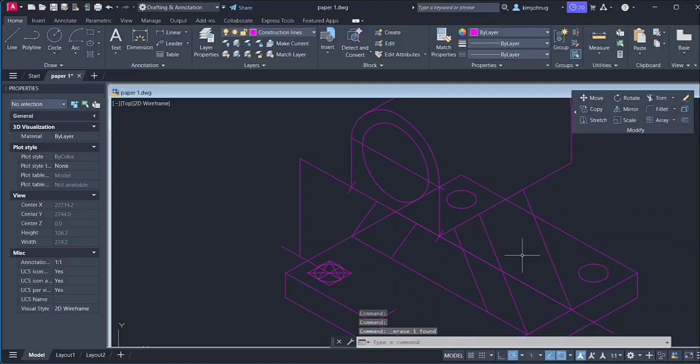So I have to trim this. Okay, so I can move this. Okay, so this line, I want to break it. This point, break, enter. Let's repeat a command which has been used recently.

Just break, just press enter. Now broken these two lines. So no longer need this, of course. My figure is taking shape, right? No longer need this also. Yes, it's taking shape. Don't think I will need this line.

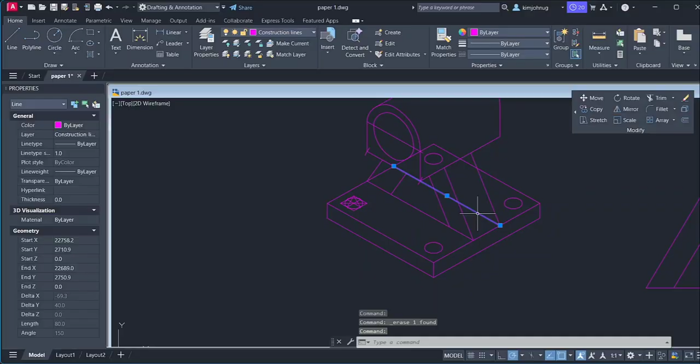Okay, so also in the back here, be honest, I won't be able to see this line, be able to see this line also. This line. So select this. Remember this is already joined, so I just have to select it all. Right. And I want to also be able to see here. I think now it's just taking shape beautifully, right? These two backs. Just taking form beautifully. I can move these.

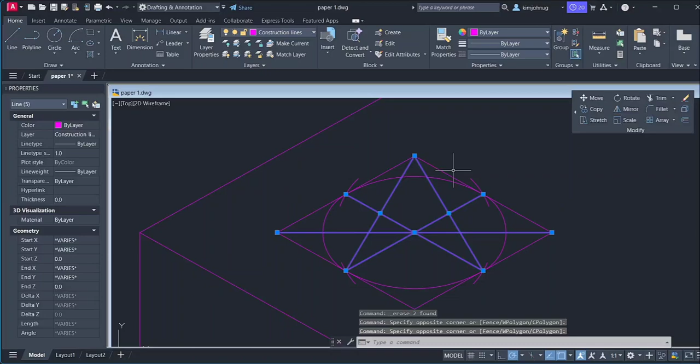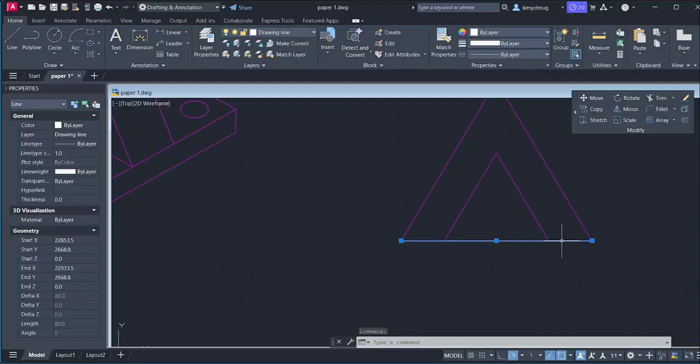So something I would like to show you. I think let me show you here. So let's say I have this figure here, right? Let's say I change this to a drawing line layer. Oh, I delete it. Drawing line layer. And I want to copy this figure without the drawing line. What I can do,

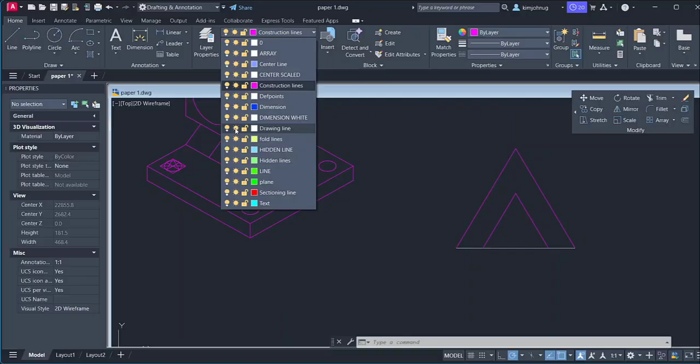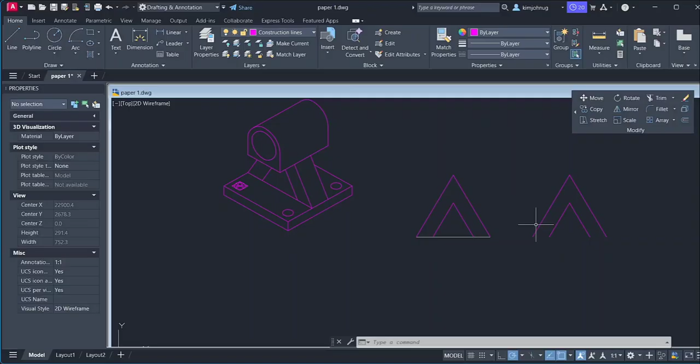I can first select, right? First select, and then I say, I freeze the drawing line. And I copy this. I have to make sure that the layer you're freezing is not the active layer. And then if I go back here and then unfreeze it, you realize that you see the drawing line layer is here, but on the copied one, it's not there. You get it? It's a simple trick, I would like to use it here. Let's just do what we have to do and then move on.

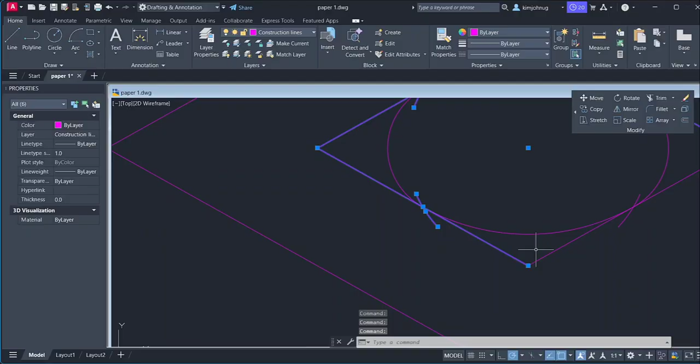Okay, so selecting these arcs and these corners. I know there are many ways of drawing isometric circles. As I told you, I prefer to draw them using my own. Okay, it's like I'm trying not to get rusty, right? I don't want to get rusty.

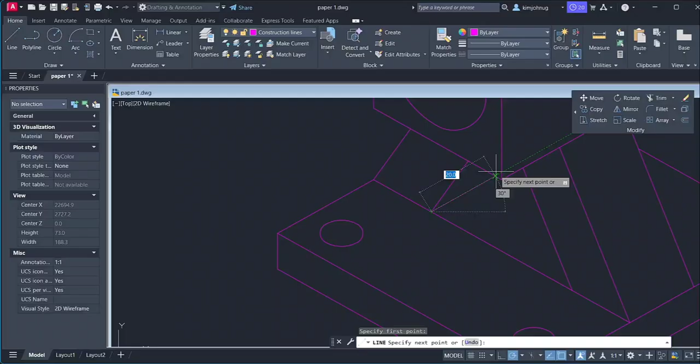So around this point here, there are fillets. Around this point here, there are fillets. So it's not as sharp. So I want to just trim off this. So this thing here is fillet here. There's a fillet here. Okay. So how do we draw this isometric fillet? Most fillets in this figure, they're like radius of 3. Radius of 3. Okay, so what can we do?

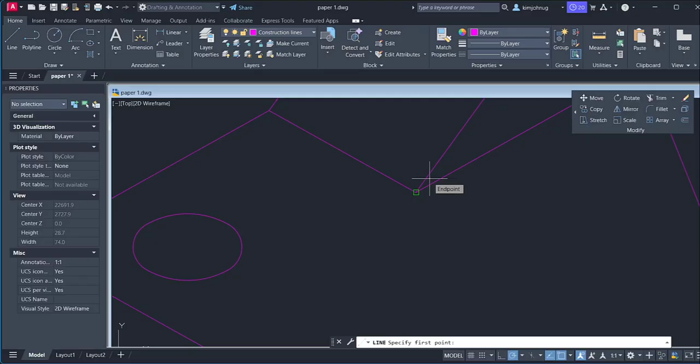We're going to draw radius here. Let's first try to draw it outside. I didn't see. I want to draw an isometric circle. 3. So meaning would be 6, right? 6, 6.

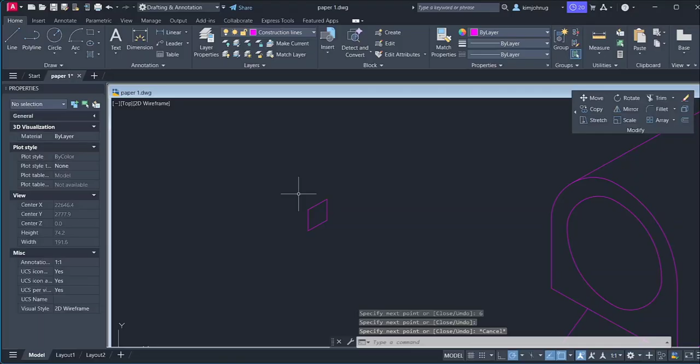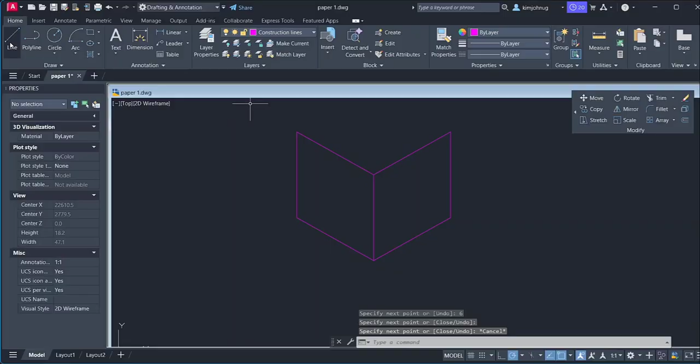Along this 6. I'm sure that the angle is so 180 minus 150 is 30, right? 6. In the midpoint, I'm trying to see. I'll be able to fillet that. Oh, can the fillet tool help me?

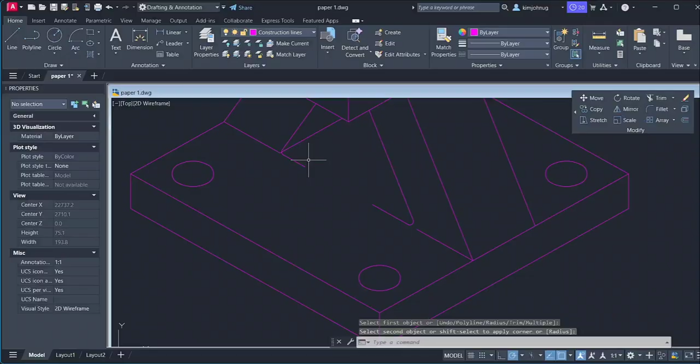It's just doing it. Hey. This is interesting. Okay, fillet. Want to fillet this? Want to fillet? Hey, just does it like that. Random. So if I want to extend this line to here, I can just extend it there, right? Do the same thing here, extend it there. Trim. Let's remove that. And of course, remove this. Remove this.

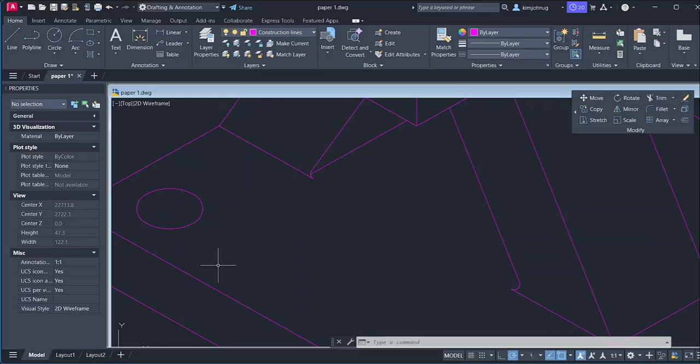So I want to use the divide tool because I want to fillet also this portion here, this line here. Fillet it. So I can array these curves along here, along this line. So I use the rectangular array for this array. That's array am I using? Yeah, I want the path array.

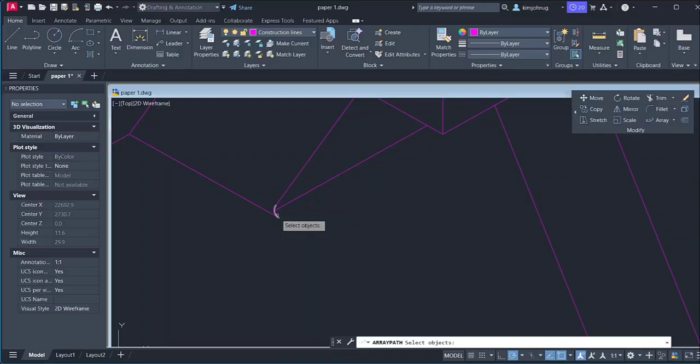Select objects here, then select path, enter. Sorry, array, select object here, enter, select path here, right? Okay. So if the spacing is too big, I can see that the distance between is 2.2. So I can, if I want to reduce it, I can say 2. I can even say 1.

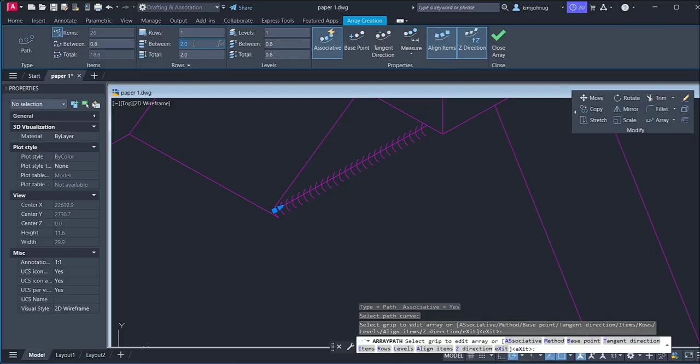But I think that works. That's enough, right? I don't need this line. Okay. So that's showing us that thing is related there. Okay. Oh, this wasn't necessary. Really? Okay, what is the radius of this fillet? So radius is 1. Okay, it works.

I have no problem with it. Another thing they're telling me that this thing is these holes are threaded. I want to replicate a thread. So to do that, I'm going to go to

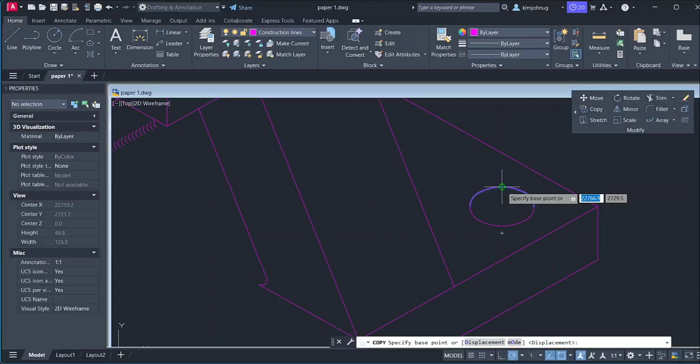a break at a point. Let me break here, break here, join, break. So join. Okay, so I want to copy this. I want to copy it to intervals. To replicate. Let's say let me do 1 right?

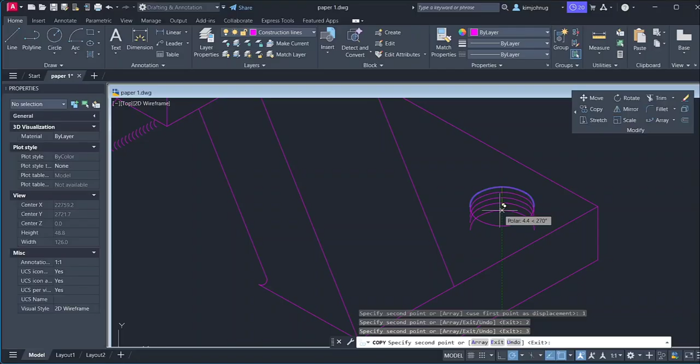So if I'm to do it correctly, I have to copy it at a distance of 1. So from here, if I copy this, the first one is a distance of 1, the second one a distance of 2, the third one a distance of 3, the fourth one a distance of 4, the fifth one a distance of 5, the sixth one a distance of 6, and this one a distance of 7.

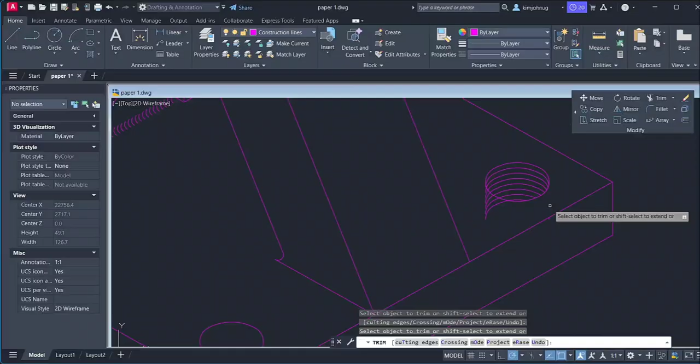I think the seventh one will be the last. I trim off this, trying just to replicate a threaded hole. I draw the extent to make them threaded. That's the one thing I could think of. Maybe you can tell me in your comments if it works. Yeah, I'm saying no problem with it.

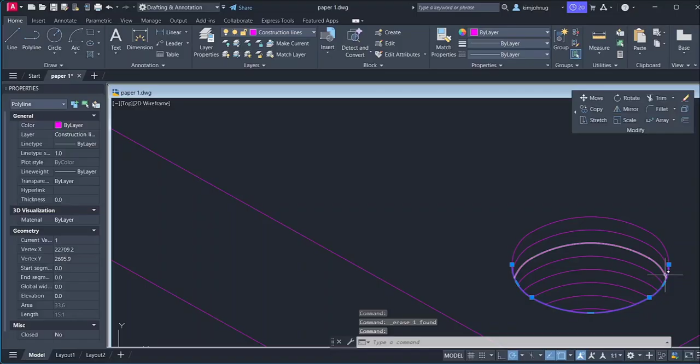So I can copy this, remove my center. I can use this join here because I think this one also has it. The same thing here. Wait, I copy the circle also. Oh, I don't need you. Sorry, don't need you, delete it.

Yes, it gives out the impression of a thread. To me, yeah, I think it does. Yeah, it does, really. So with that done, can literally delete this. Don't need them no more.

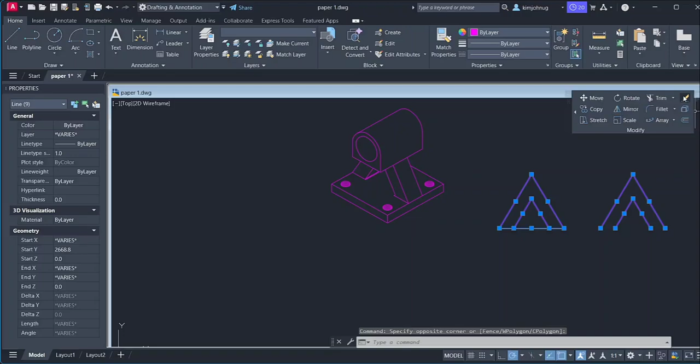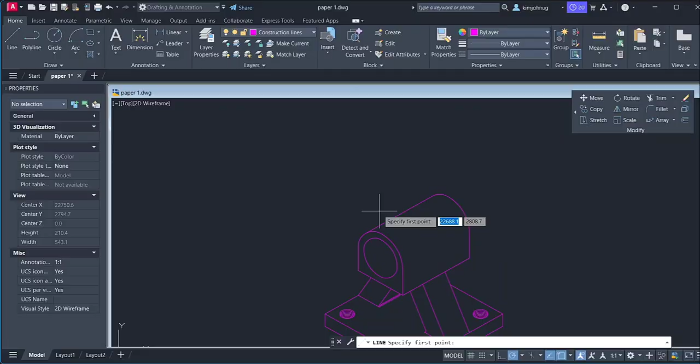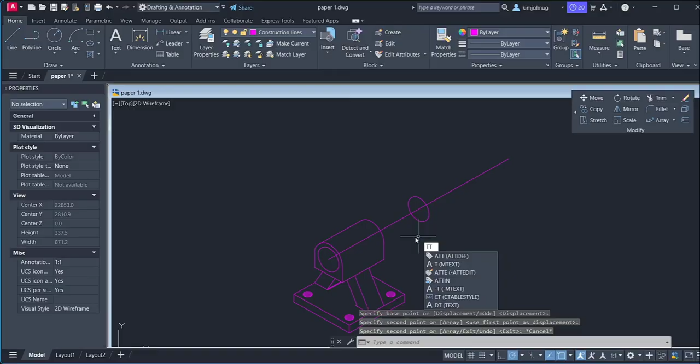So I can just copy this circle, need this to distance. That's close enough, even delete. I delete this line, don't need it more. Okay, so the bearing goes, it's of a distance of 60, so I measure 60. Do I need you no more? I don't think so.

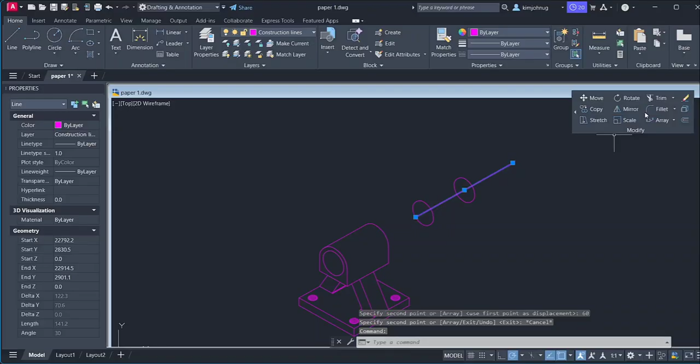Okay, so I'm on the bearing. So I draw a line doing the bearing, draw another line, bearing. So trimming this side and this side. Excellent. So there's another circle inside the bearing of radius. I'm going to do this circle outside here, for some reason.

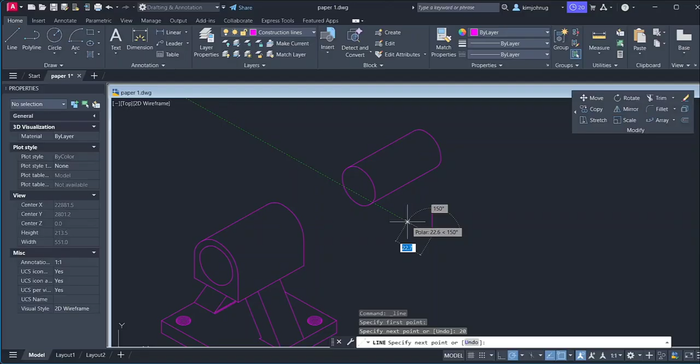Radius diameter 20, meaning it has to be a square of 20 by 20. I want to draw it there. Let me just draw it here, just copy it, right? That one is there.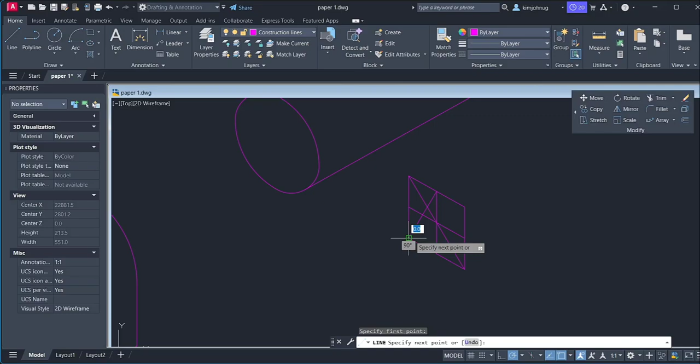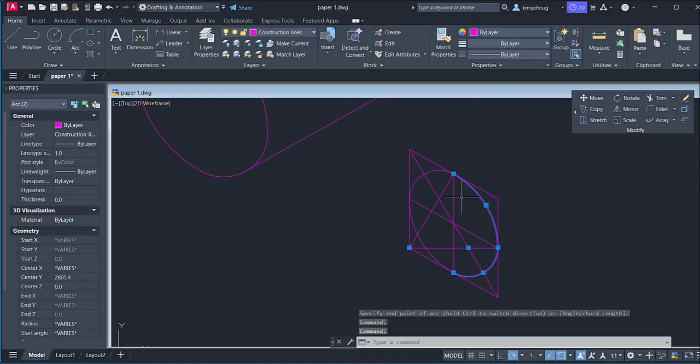So another line here too. Then select your tool, center. Oh, stop again. Tool, center, stop again. How quickly the brain forgets. Someone told me the one thing the brain is good at is forgetting. It's interesting, it's the one job it does right. That's interesting because I have done these things multiple times, but I can't concentrate on where the start and end should be.

So here, bring it. If you're looking for something and you don't see it, you have to just touch on the circle you want the center to be. Okay, I can delete this, I don't need you no more.

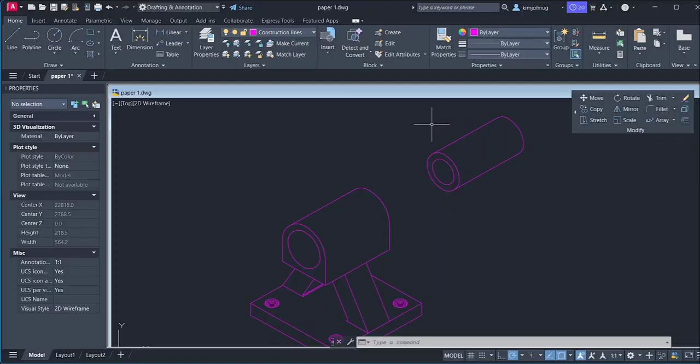Right, so with that our drawing is done. Maybe this one seems a little too far, let me move it a little closer. There. Yes, yeah.

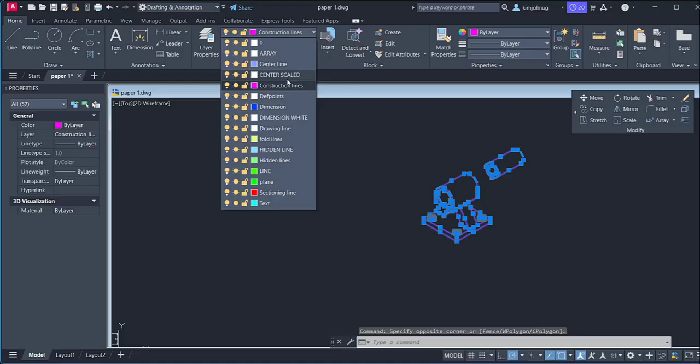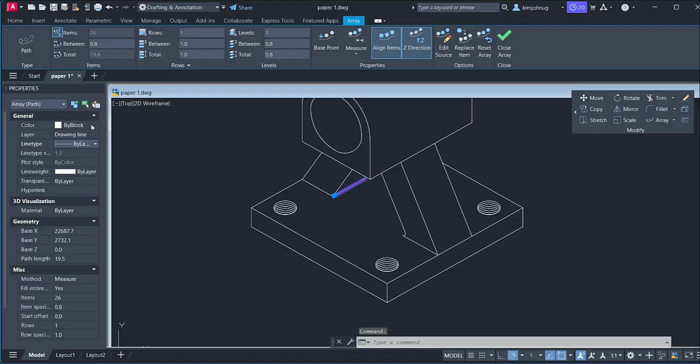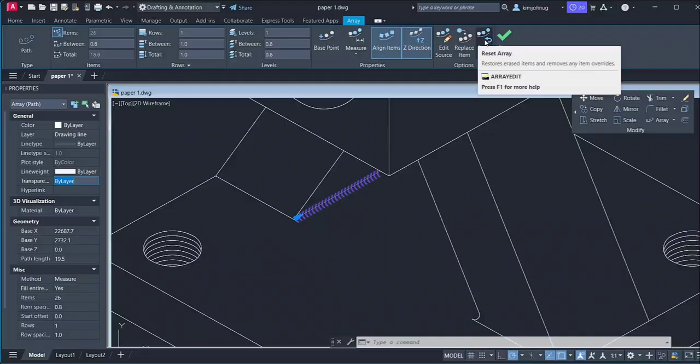Let's see how we deal with that. So with this, our drawing is almost complete. So what's remaining is the dimensions, right? I want to place center lines now. A center line that doesn't pass to the center, interesting, because a center line has to pass to the center, right? That's what makes it a center line, that's what gives it its name.

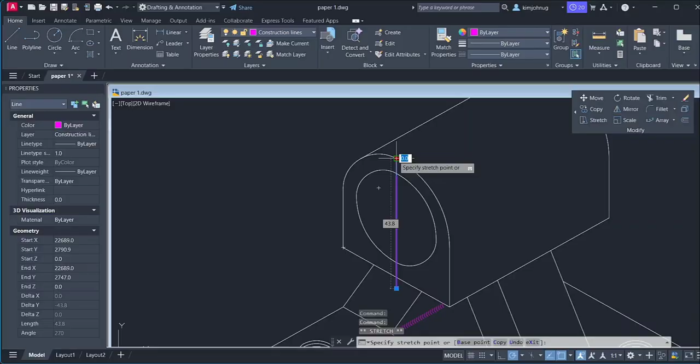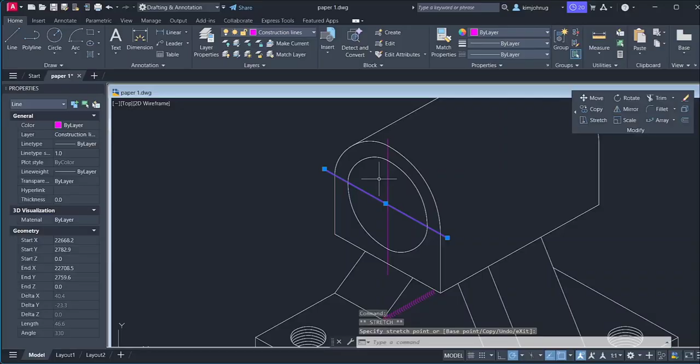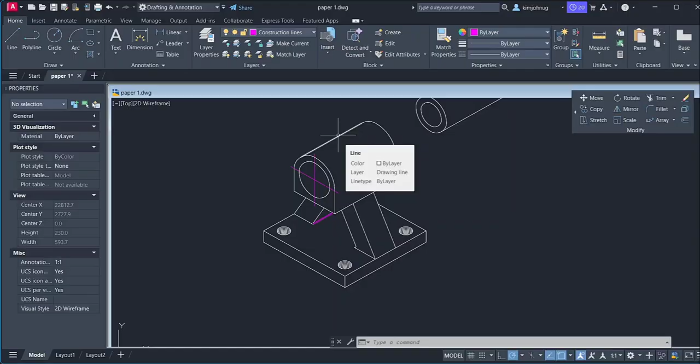It's like the way they named the dandelions, because they resembled lions, resembled the mane of lions, right? So they'd have named them zebra, dandy zebras, because they have nothing they resemble, that's like a zebra. I really like how people name things. Some naming, when naming something, some people are just lazy, right? Yeah, some people are just lazy. Example, like names of which word, they like when you're saying what comes after noon and then you name it afternoon. That's interesting. And then when it's afternoon, close to night, then you name it evening. I think the person who named afternoon was fired. Then they brought in a person to name evening. Interesting.

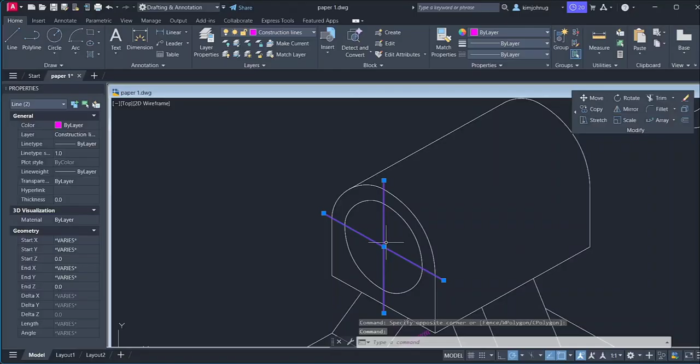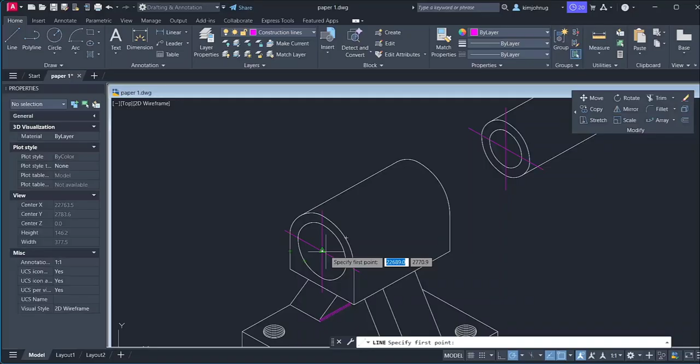Okay, so I'm placing the center line through the centers, of course. Where else should I place them? I'm going to change their layer later. First of all, I'm concentrating on the alignment, right? I like to use the construction layer when I'm drawing.

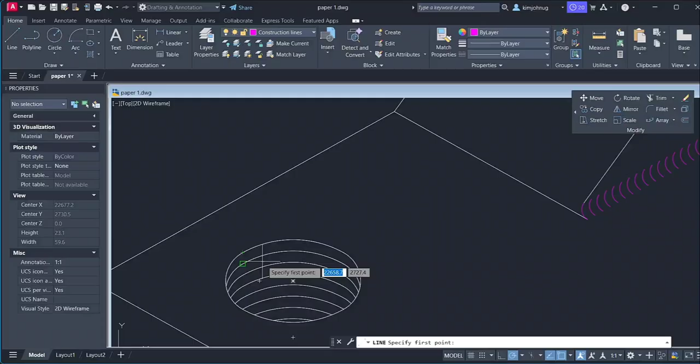I also have to place the center line here. Okay, let me pass it through the center, because the geometric center, the center of... the angle has to be 30. It's with me. Okay.

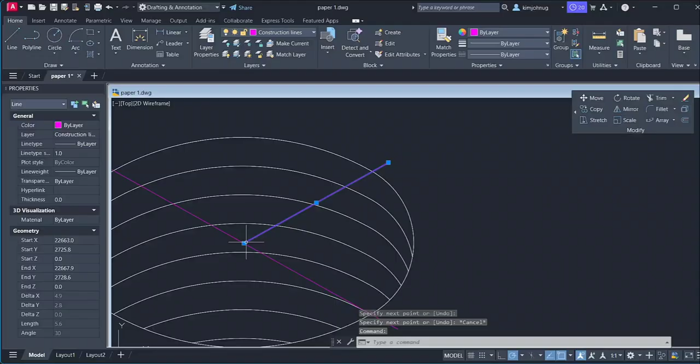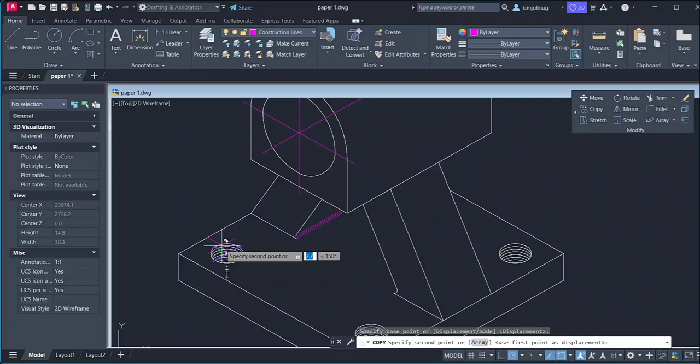I like these points which show the centers to be in the center. I can just copy this to all. Okay, geometric center, where are you? If I don't see you, geometric center, where are you?

Okay, place it there. I just remembered to join this member. Now select, move... geometric center, where are you? Yes, here I am. Okay, so our center lines are there.

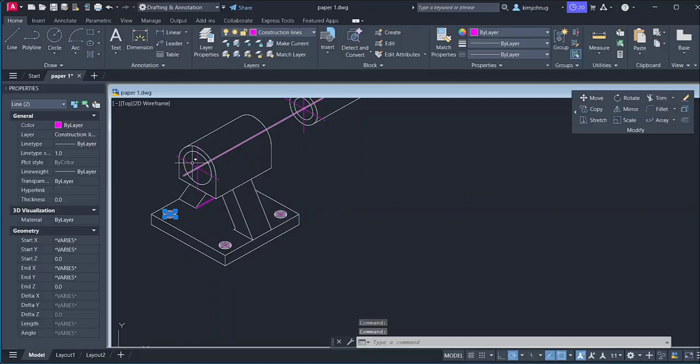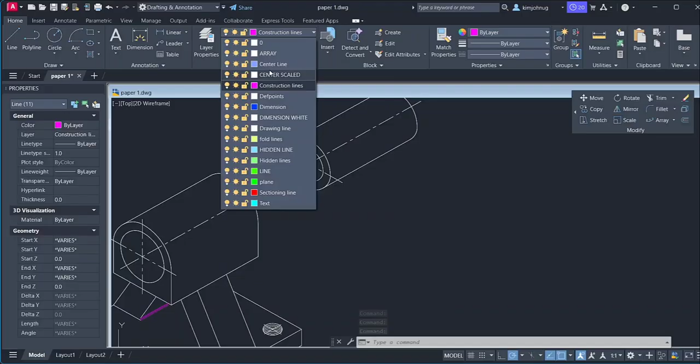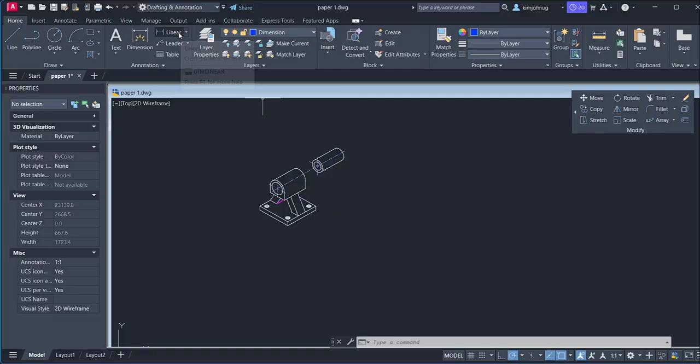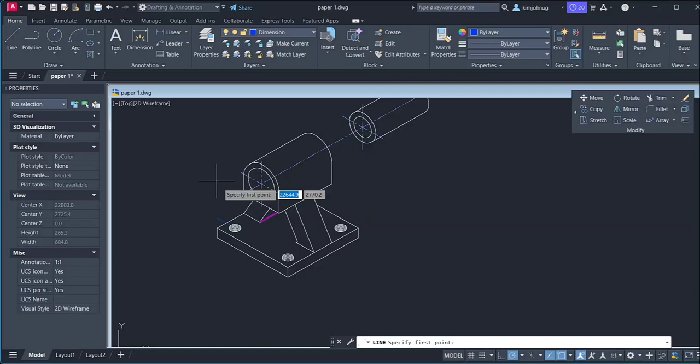Okay, so for dimensions, my dimension layer is blue, and then dimensioning lines. Let me first draw the extensions. One extension starts from here on the center line. Another extension from here, give it some curve. It's a dimensioning rule that the extension line shouldn't touch the drawing.

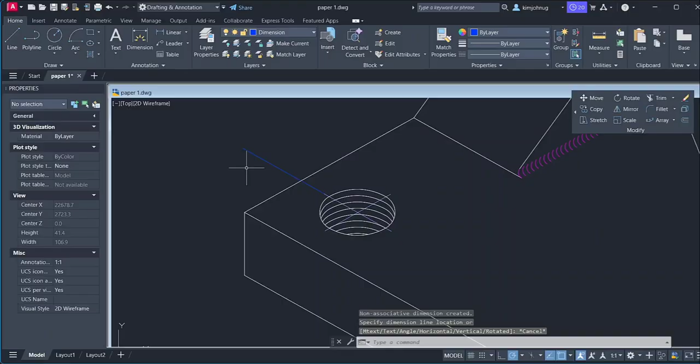First, give it some breathing space. For example, here, the extension line can start from there. I want it to be in line with this. Okay, so it has refused. Yeah, because of the angles. Maybe I can just break it off. This, what I can just copy it. Okay, let me just leave it because I have to cater for this space here.

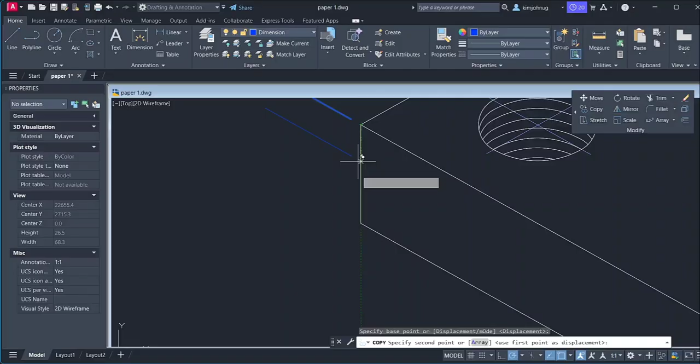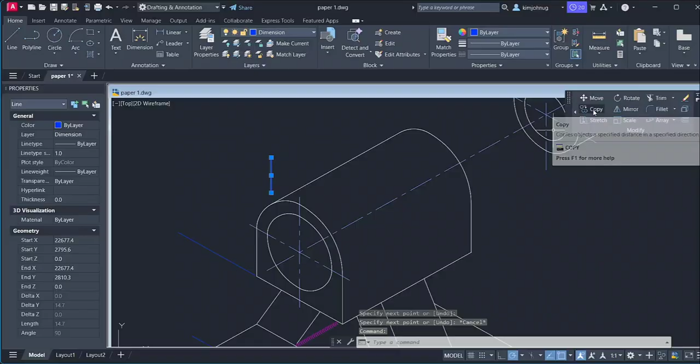I'll just extend it later. I have to copy that from here to here. Where else do you need an extension? Extension line, yeah. I'll copy this to a distance of 60. Okay. Right. Then the extension line.

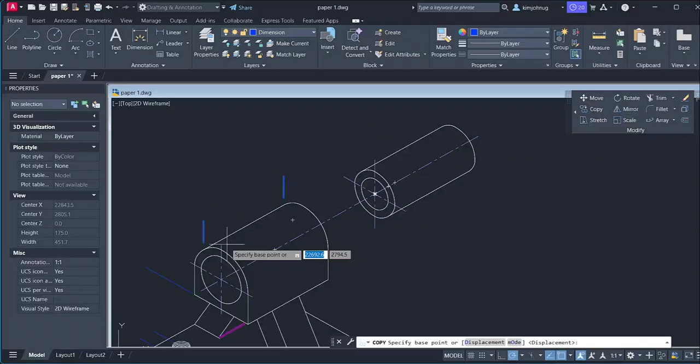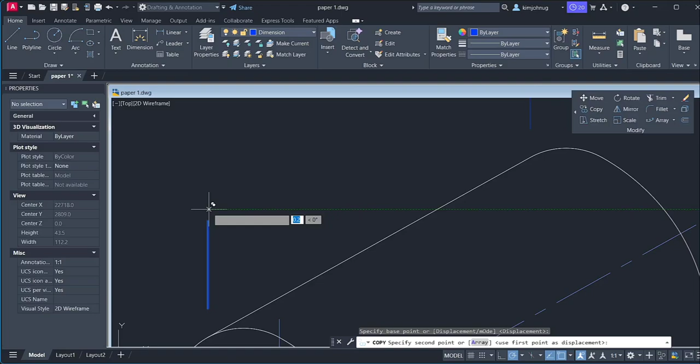Yeah, why not do the same? I change it there. Yeah. Okay, so that's there. And so I can utilize this. Copy it. I want it a distance away. Okay, so if it's too long, I'll see what to do. But then I have to add dimension.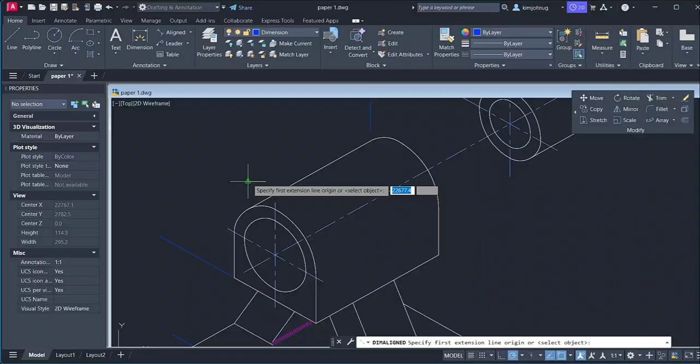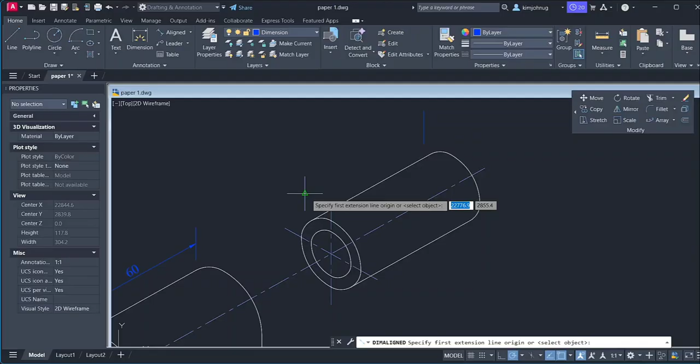So they are linear, and I'm going to use align because most of these dimension lines are angular, right? So I want this to lie on my extension line like that, and I want this to be slightly on top and in the middle. Okay, do the same thing this side. This, yeah, I have done my extension line, so I don't need to use this.

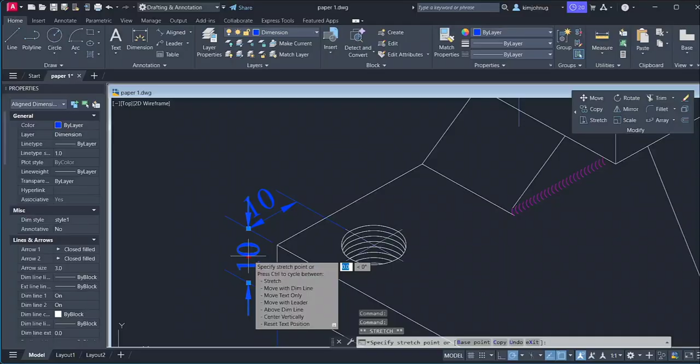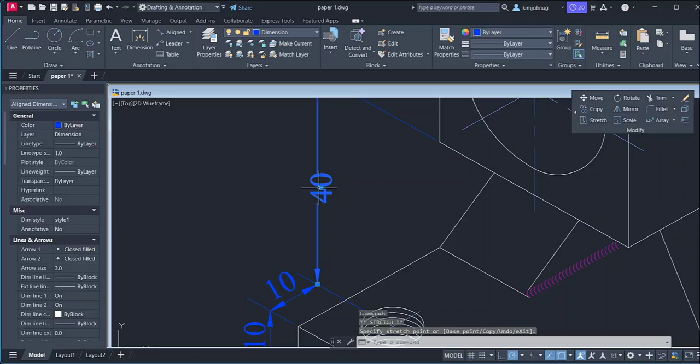Okay, so what are the dimensions? Okay, we have a dimension here. This point, yeah, it's 40. Because I set my dimensions to the units of millimeters. That's why when I was drawing, I told you that the units were in millimeters. I set the dimensions to that. I also set the thickness of the dimension weights. But if you want to change it, click on this, and then you go here.

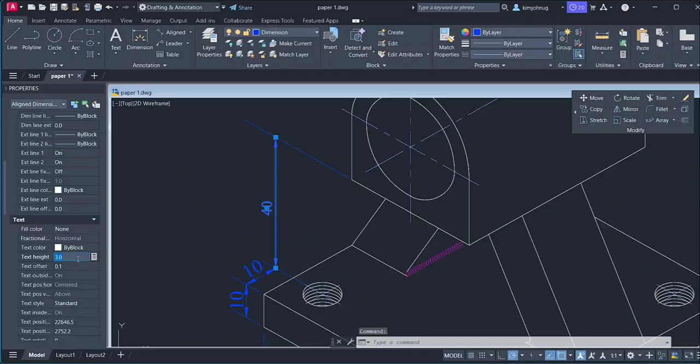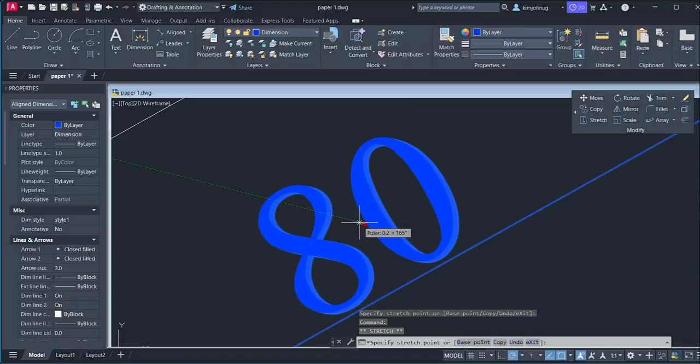Height, you can make it 3, it will be less. I think it... I prefer 4. This works. Okay. So move here, do the dimension of this. Yeah. Up a bit, up a bit. Yeah, maybe still getting too much on the line. Okay. Do the same thing for here.

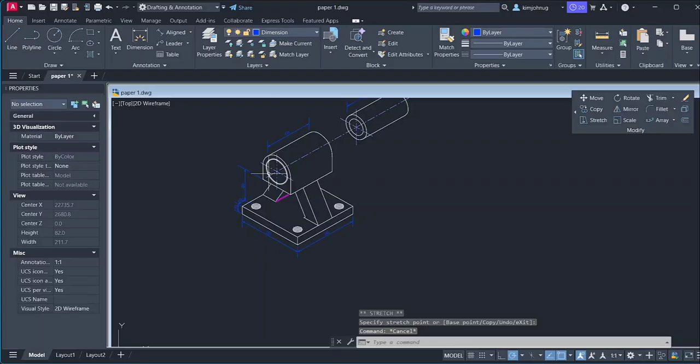Oh, my extension lines. Okay, so we have other dimensions, like for example, the thickness of this is 18. Yes. Also, same thing this side. It goes through.

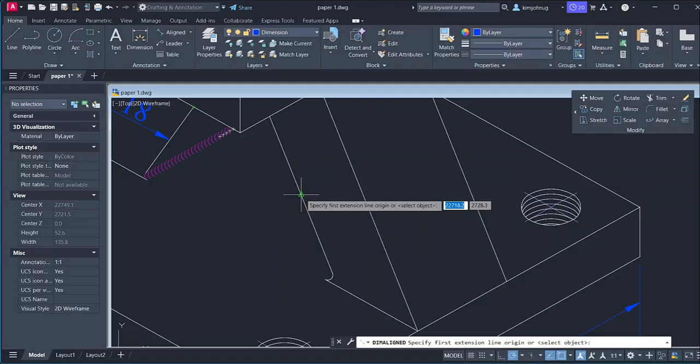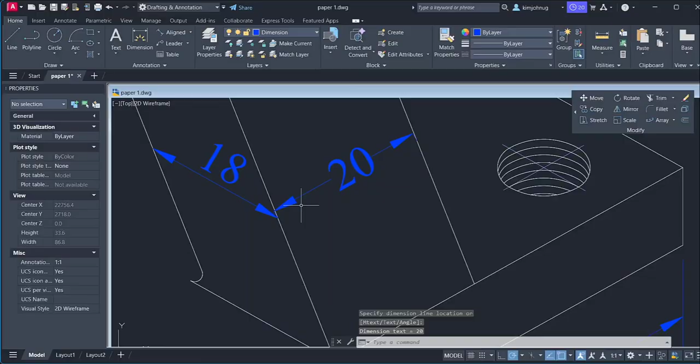So it's not the same. It is the same. Why wouldn't it be the same? There's no reason for it not to be the same, right? Move it up a bit. Okay. Then the thickness of our bracket. I think it was 20. It's 20. Move this extension line to this corner.

Okay, so we are back.